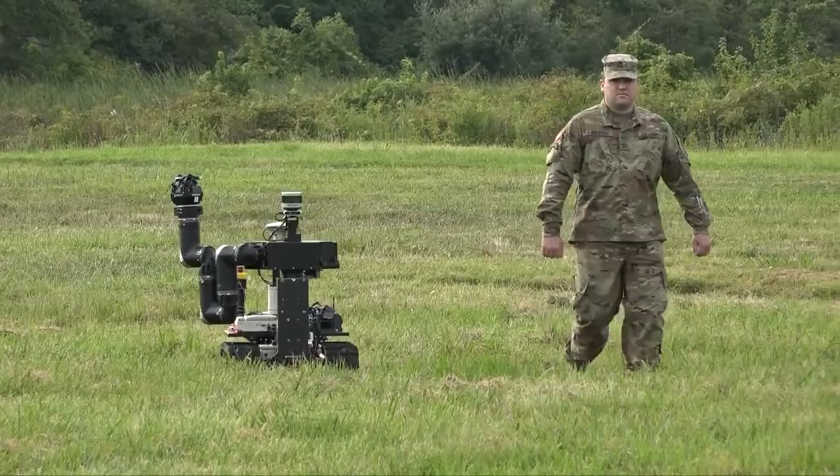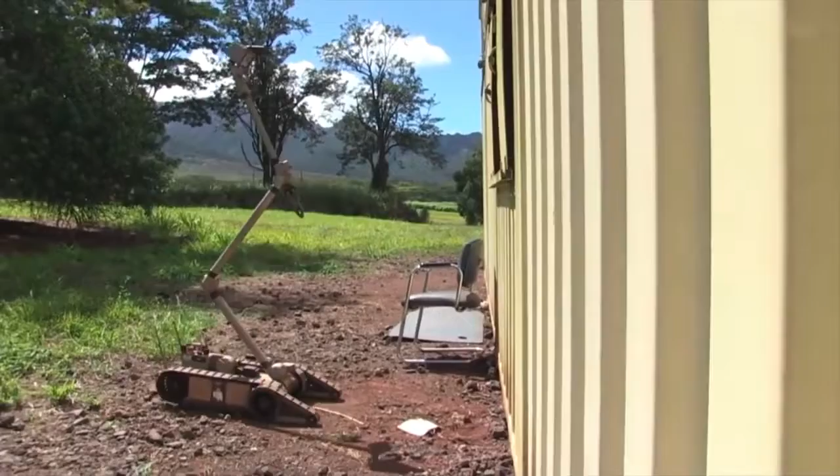The U.S. Army wants robots to operate as soldier teammates without a need to teleoperate robots. To do that, robots must operate autonomously and be able to help a soldier see into places too dangerous to investigate, move into places too risky to navigate, and interact with potentially very hazardous environments.

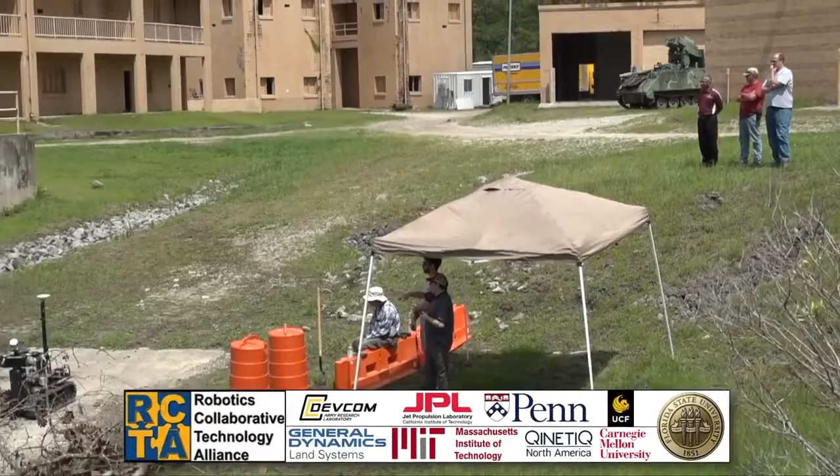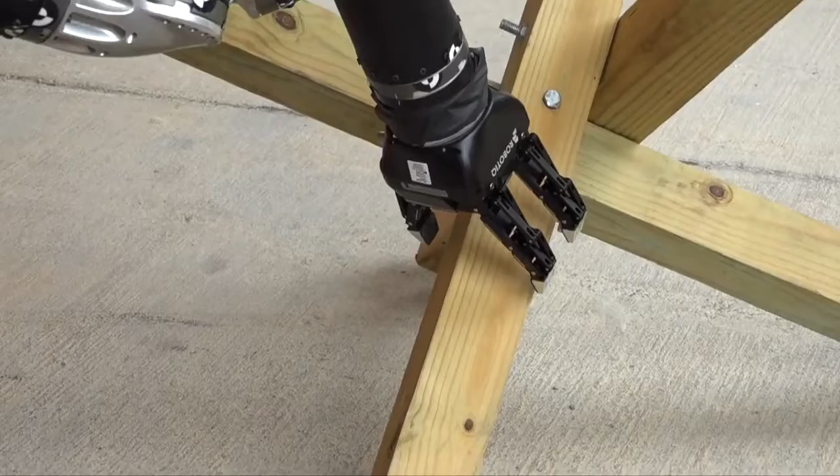At a military training site designed to look like a war-torn city, a team of researchers supporting the Army's Robotics Collaborative Technology Alliance, or RCTA, are testing out years of research aimed at getting robots to perform human-like tasks such as see and understand its environment, zero in on an object of interest, and remove it from its path.

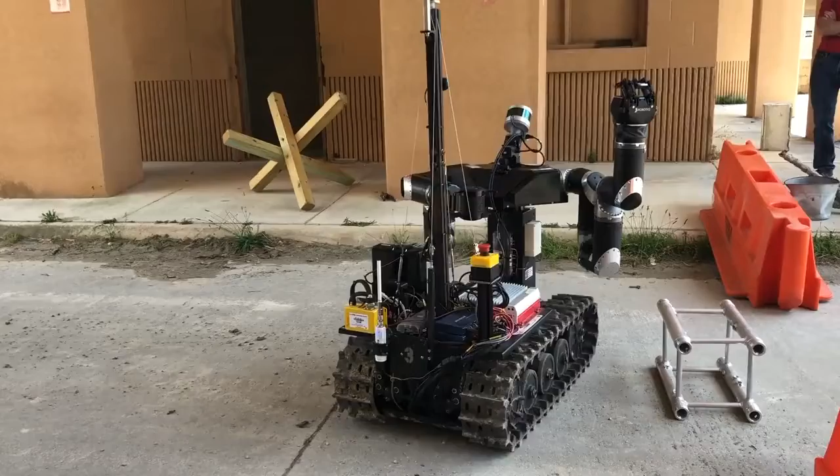In robotics, those capabilities are referred to as perceive the environment, plan intelligent actions, and interact with the environment. These capabilities may seem simple and come rather easy for humans, but are extremely difficult for robots to perform autonomously.

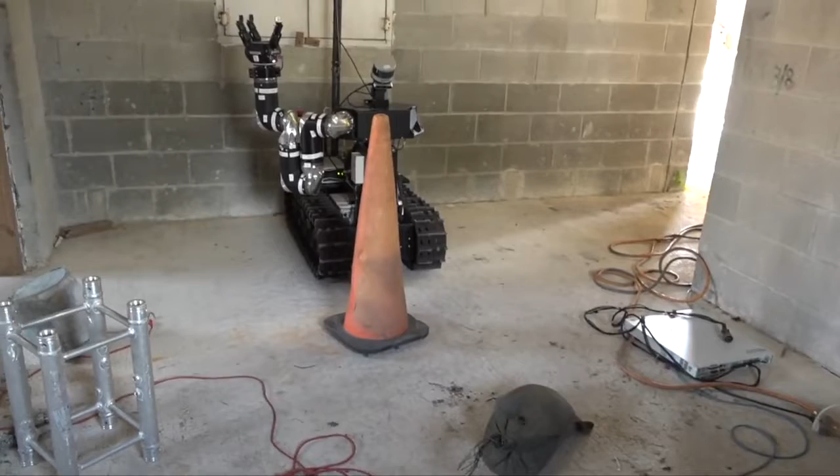It's hard to solve all three of them at the same time because they're interdependent, and so errors in your perception affect how you go about doing the planning. And errors in your plan are affecting how you go about doing the mechanics. Errors in your mechanics, it's all fed back into one another.

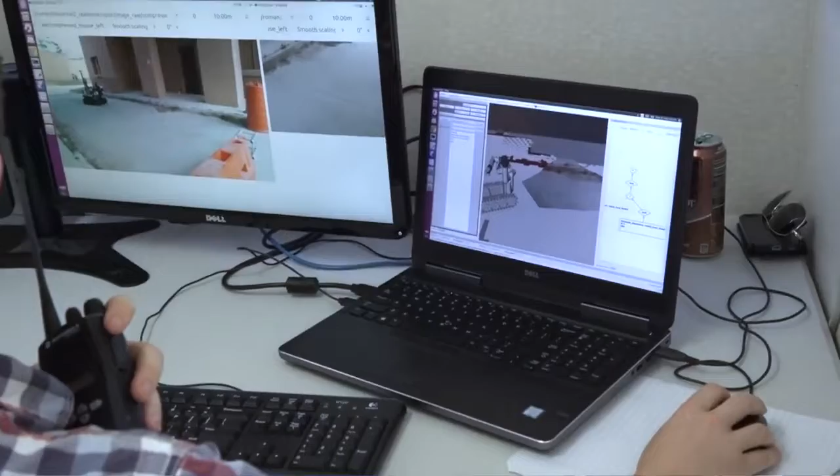And so that interdependent relationship between those different problems is an important factor to consider, so that you're not just solving perception in a stovepipe for the sake of perception, but when you solve that perception problem, you're considering how your solution is going to impact the planning stage and the mechanical execution stage.

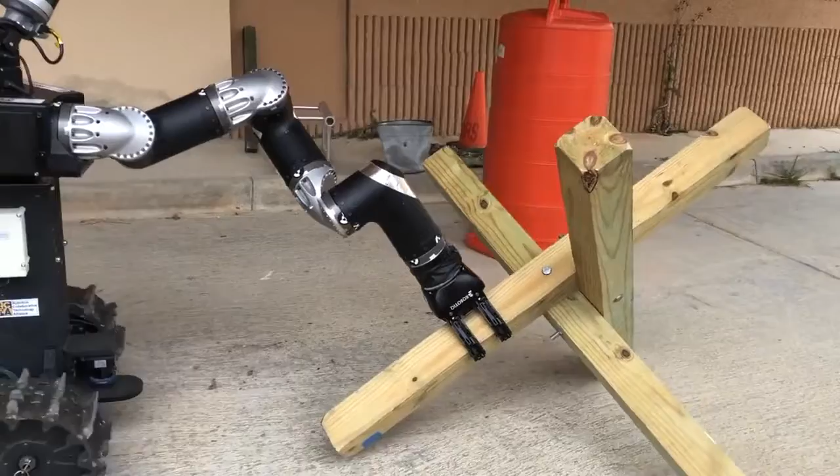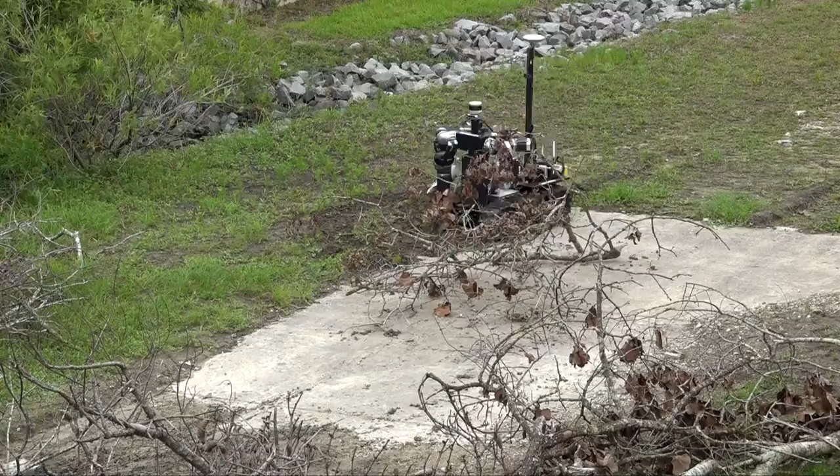I'm very confident that given enough time, given Moore's law and the increase in processing capability, that we're going to overcome those challenges at some point in the future. The question is when. And for the Army, it's really important that we solve those problems first, right? If we have solutions to those issues before anyone else, then we have an advantage on the battlefield. That could mean the difference between winning and losing a battle, and ultimately winning and losing a war.

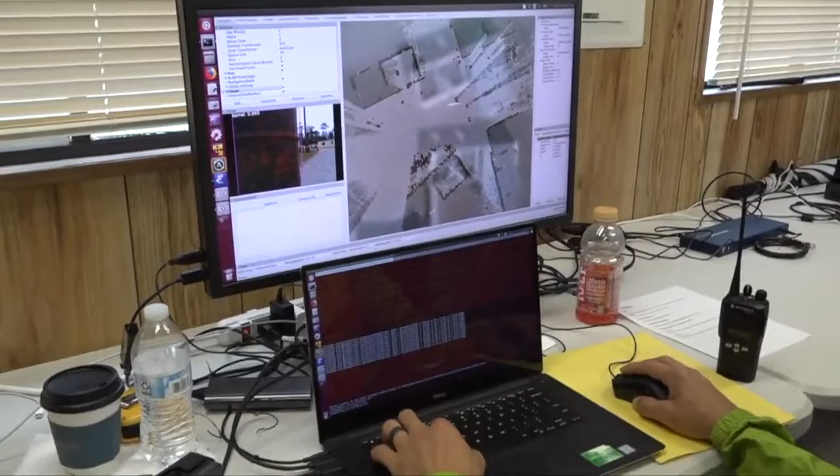The Combat Capabilities Development Command Army Research Laboratory, also known as ARL, is a leader in autonomy research for the Army. Its Robotics Collaborative Technology Alliance has attacked the most difficult research problems in government, academia, and industry around autonomy.

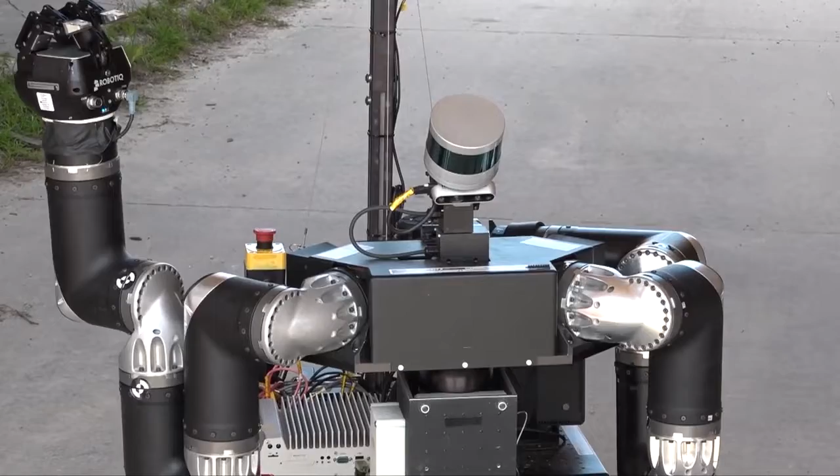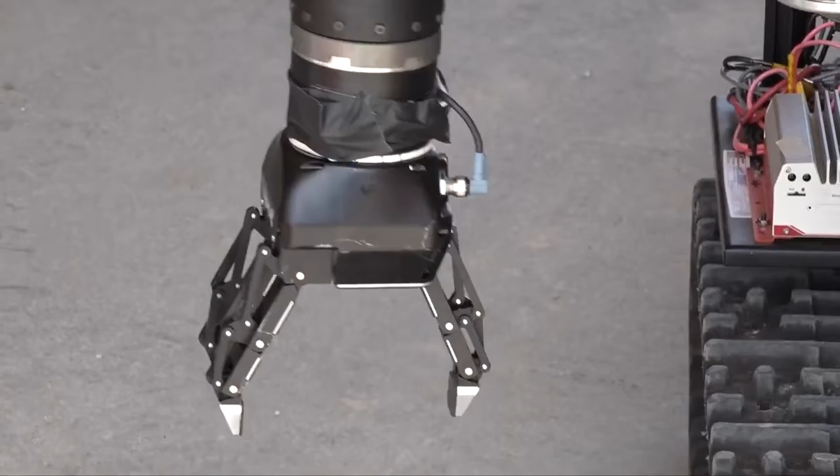In RCTA, we're interested in the problem of deconstructing or clearing a pile of debris autonomously with a robot. And JPL is contributing one piece of the puzzle, which relates to allowing the robot to plan how to move its hand in order to grasp the pieces of debris that make the pile.

The work that we're doing here is in addressing multiple problems at once. So the team is working with the robot and observing the robot behave and trying to understand what the robot is doing, and through that understanding, communicating, giving the robot more knowledge about the way to solve its task. So the team is observing the successes and failures that the robot is encountering and using that information to program the robot to be better at its task.

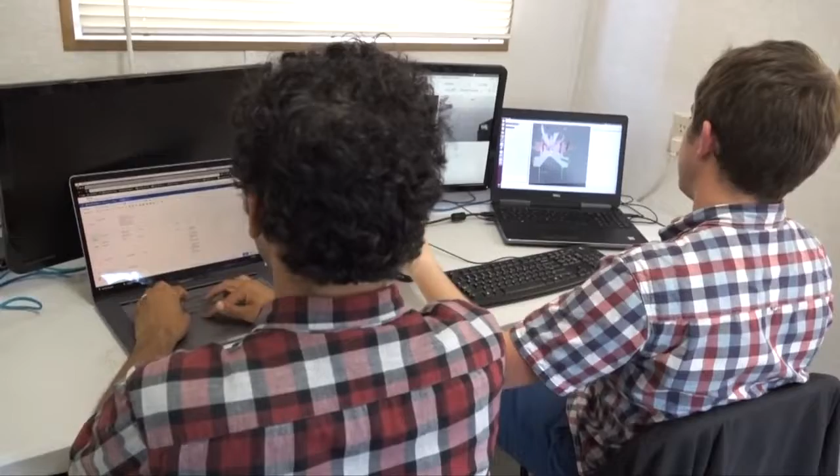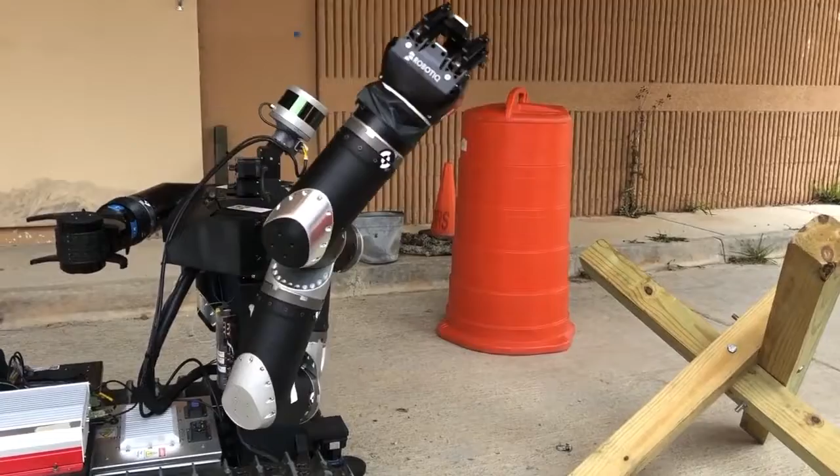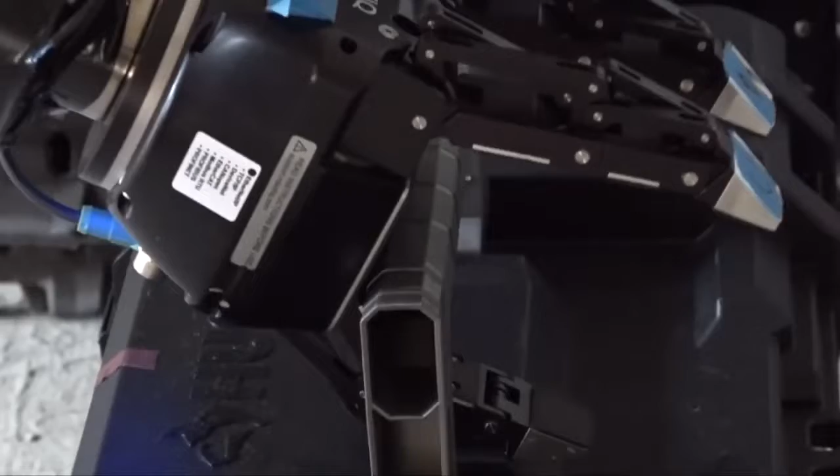Grasping things is super intuitive for humans. We're training to do that our whole life, and we have years of experience using our hands, but also interacting with objects that become familiar with time. And robots don't have that luxury. A robot gets a few hours, a few days of training, and it doesn't have all the prior knowledge, all the familiarity that a human has. The problem that we're trying to solve is to develop algorithms that allow robots to grasp objects that they have never seen before, despite all of those difficulties.

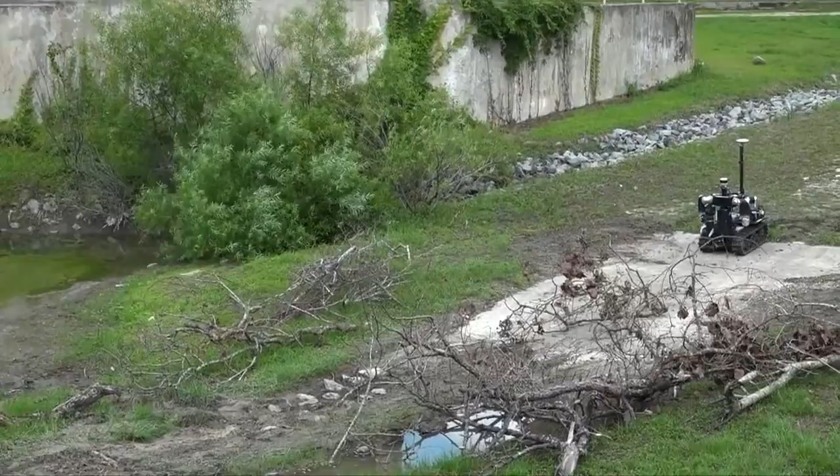To better understand the scientific challenge, let's first understand the experiment in a military context. This task aims to reduce soldier exposure to battlefield hazards by autonomously performing a complex sequence of human-like tasks at op tempo. Here, Roman is deployed to clear a path.

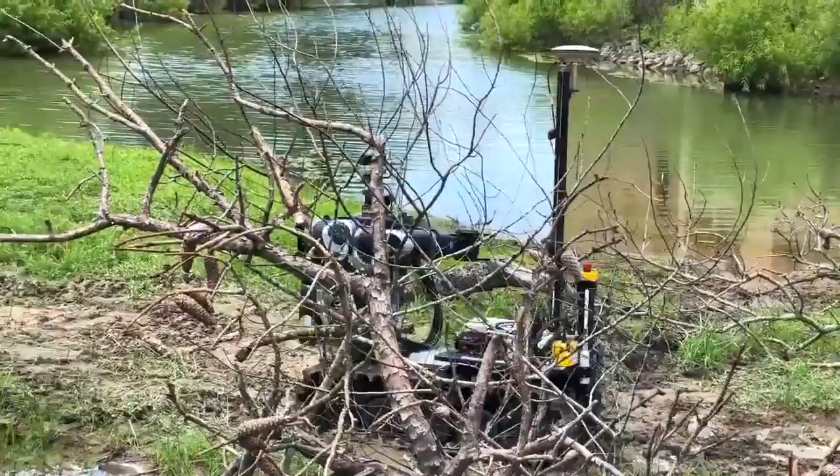Roman drives up to a pile of obstacles, determines how to grasp and manipulate an object in the pile, lifting if it is light, dragging if it is heavy, moves it out of the way, iterates through all of the objects in the obstruction, and finally proceeds along the cleared path to check for additional hazards. Such autonomous robotic capabilities will decrease soldier risks in areas under fire if chem, bio, radiological, or explosive hazards are present, or in a breach scenario.

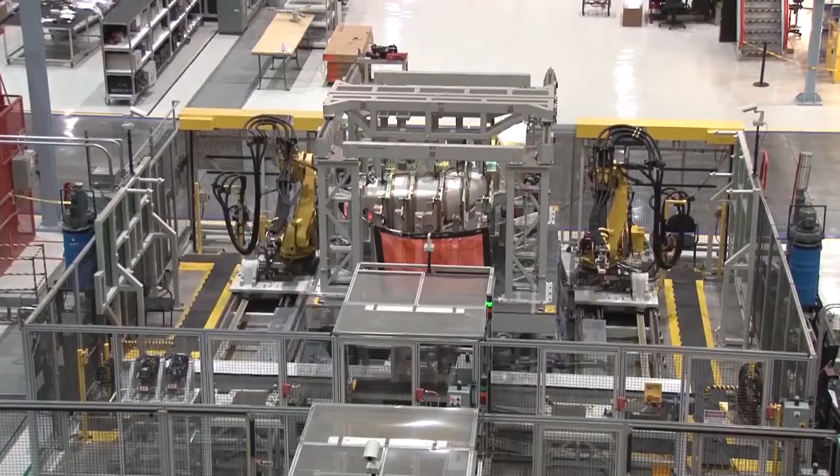This is really the science of perception for action. The main challenge is that we deal with unstructured environments with a lot of uncertainty and with very few data available, as opposed to factory environments where everything is structured and both the hardware for the action and the cameras for the perception are very well planned.

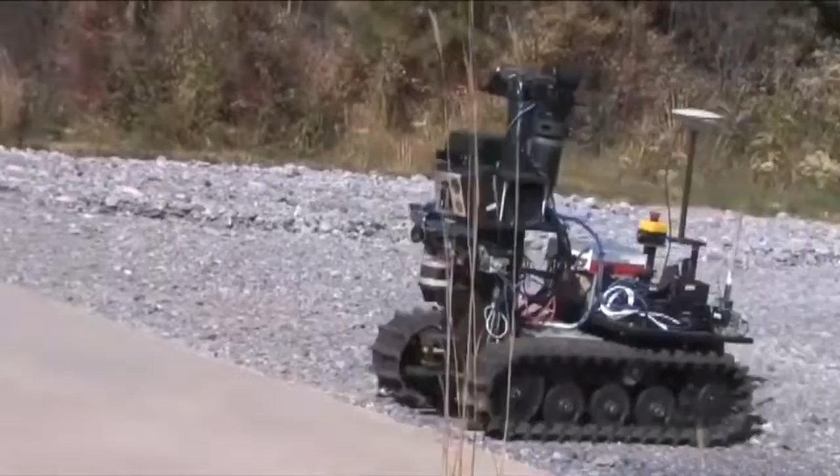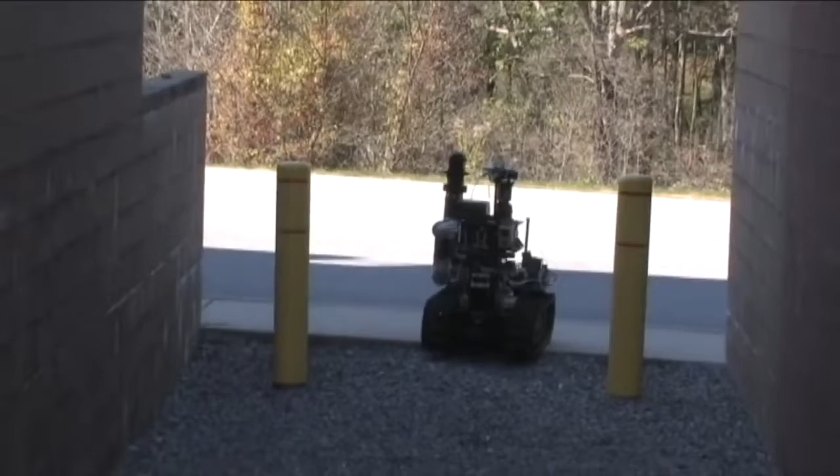In perception for manipulation in this challenging environment, we don't know where the objects are. We don't even know what are the objects. The objects are unknown. Nobody has really provided a database of these objects, so we cannot go ahead and apply any commercial algorithm for that. The problem is still very open.

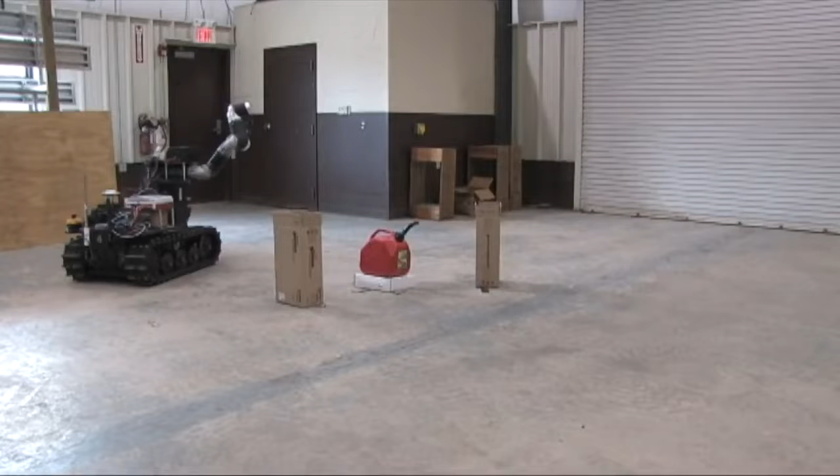It is very open because not only we want to locate these objects, independent of their shape, independent of where they are when they are blocking the road, and then we need somehow to figure out how to grasp them. And when we grasp them and they are heavy, because we're talking about obstacles blocking the way for tanks, for example, then we really have to figure out somehow also their physical properties.

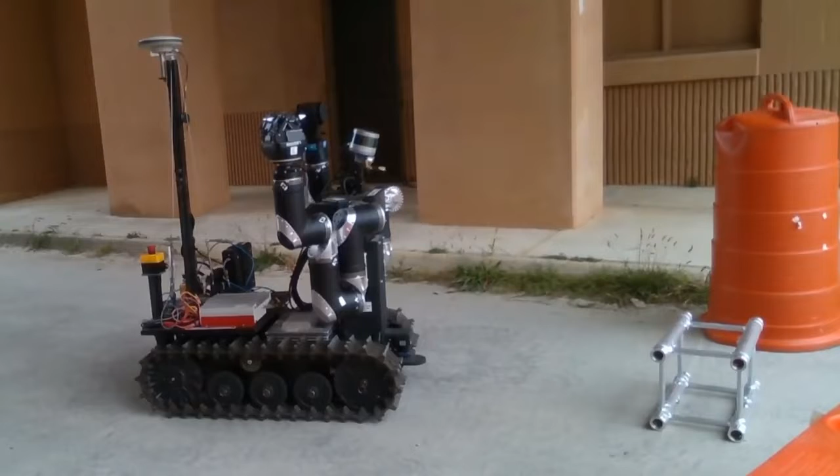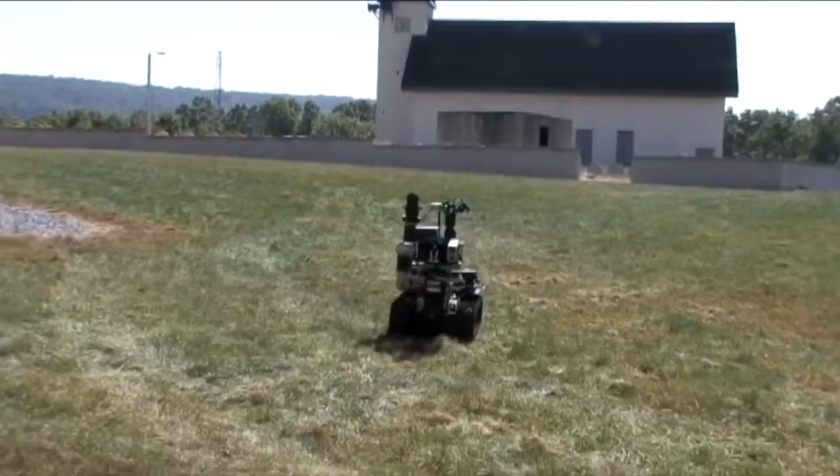We have somehow to have an estimate about how heavy they are so that we plan the right grasping pose based just on what the cameras see and doing it autonomously. There is absolutely no remote control here. Based just on the images, first from far away to detect where are these objects, and just in general obstacles. We don't know whether they are chairs or any other barrier. And then we have to figure out, based on the perception from close, where exactly to grasp them, lift them, and then drag them out of the way.

A short distance away is a group of software engineers who are helping Army robots detect and manipulate unknown objects and navigate unfamiliar environments. The challenge of unstructured environments is by no means just under the military's purview.

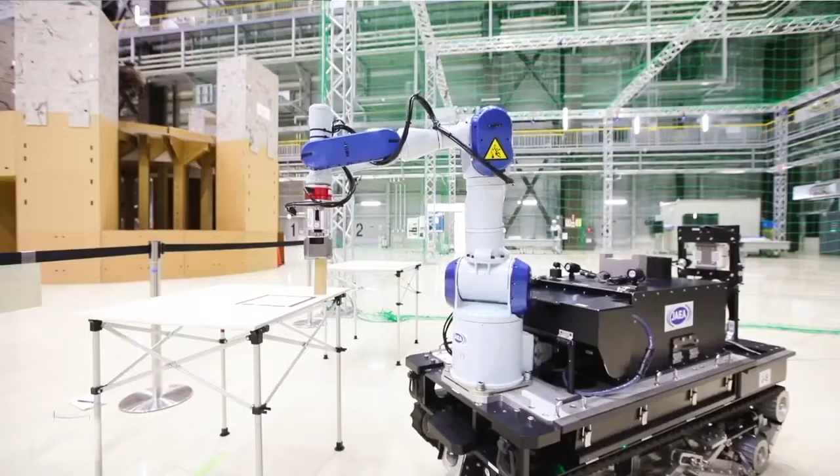There have been other research projects, such as the DARPA Robotics Challenge, where teams were seeking to develop platforms that could go into a radioactive nuclear plant, such as after the Fukushima nuclear disaster, when humans couldn't be sent in because of the massive radiation levels, but there needed to be tasks done, such as sealing up the reactor to keep the city safe. So that DARPA Robotics Challenge developed technologies, some of which led into the technology of the RCTA and motivated the need for this operating in unstructured environments, which is not being solved by industry.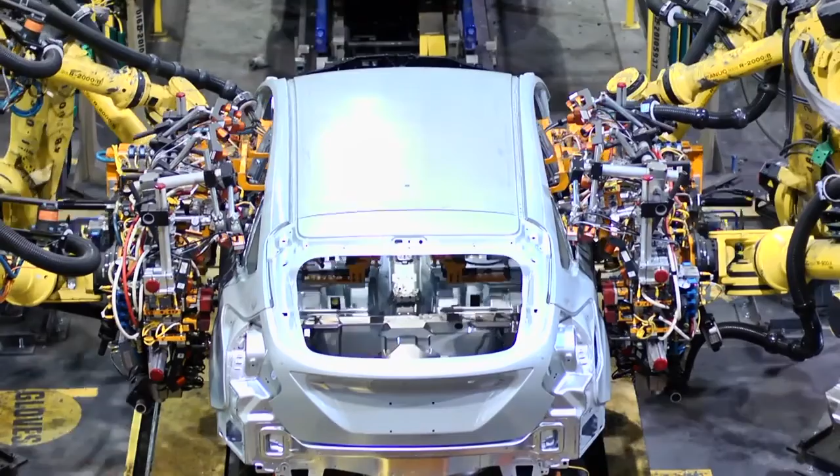For many years, robotics has been very effective operating in environments like industrial automation, for instance, like in car manufacturing, when you have a vehicle production line and giant robotic arms that have to move to a very precise location, spot weld something, go somewhere else. The environment they operate in is very structured, and we can know exactly what they have to do and when. By contrast, we are operating robots in a very unstructured environment.

The idea being that, say, were the military to deploy something like the RoMan to a battlefield, they would send it in ahead and give it some level of instruction like, let's pick up this debris object. And it has to perceive that debris, figure out how to interact with it, lift it up, transport it around with no prior knowledge of the area that it's going to be working in. So it's that unstructured environment that adds the large challenge to what we're doing in comparison to traditional robotics.

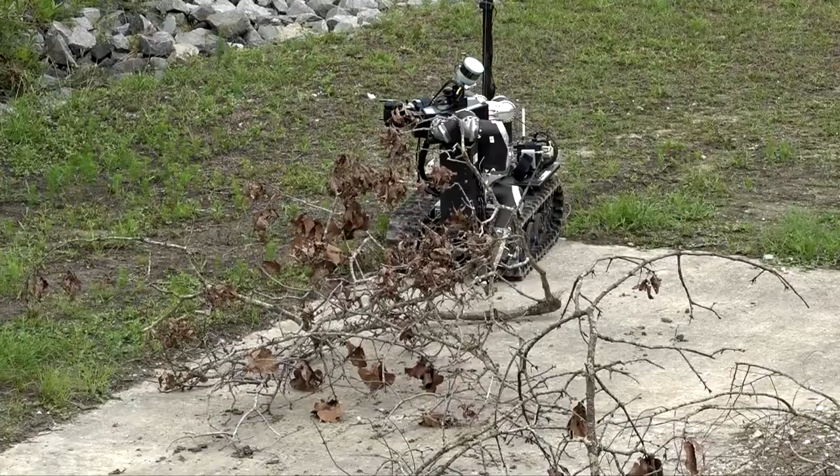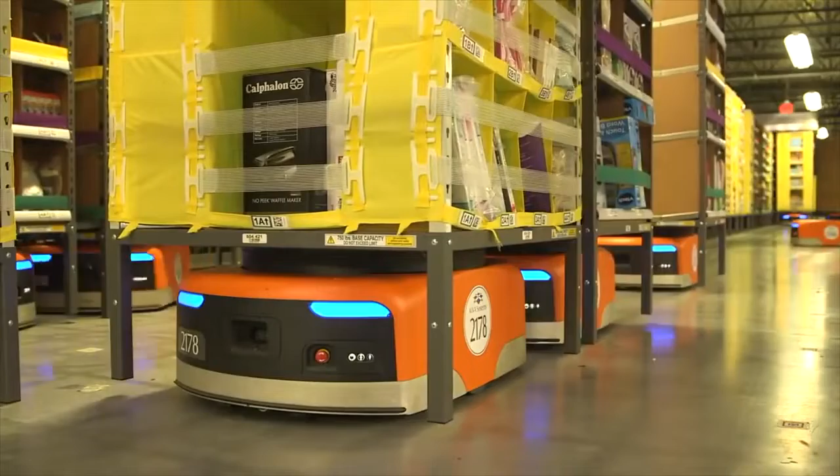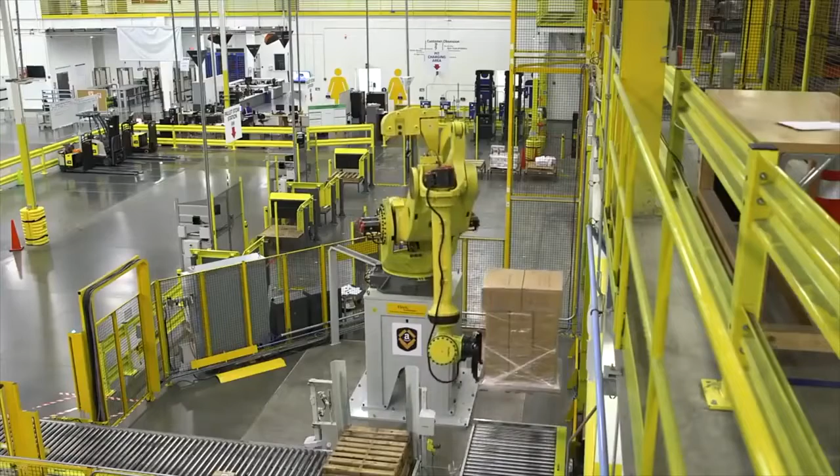The problem with the algorithms available in industry is that they are almost non-existent for this unstructured problem that we're facing. Companies like Amazon, for instance, use an extensive amount of robotics in their logistics and warehouses and such, where you have an extremely ordered environment. You know where the shelves are, you know where all of the different visual features of your warehouse are. You can send the robot from point A to point B quite easily and say, lift up to this height, grab box A from shelf C, as opposed to this, where we have no concept of what environment we send this robot into.

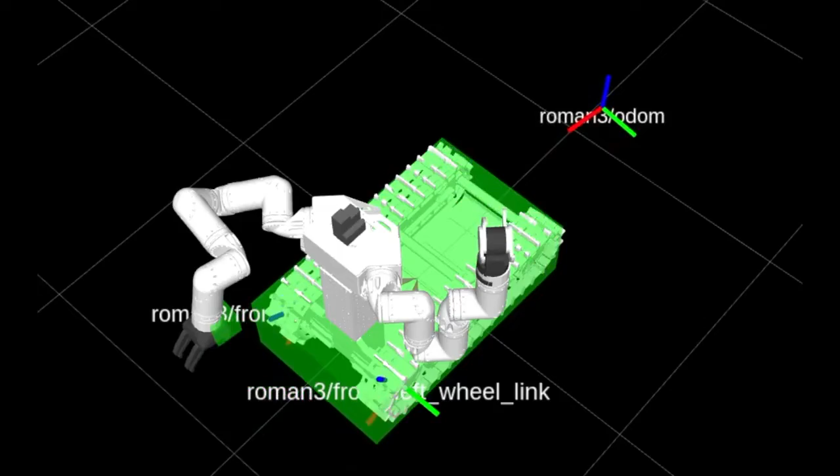So that is where the novelty of this research comes in, in that we are developing new algorithms that allow us to interact with these unforeseen objects and things that the robot hasn't been explicitly taught to work with.

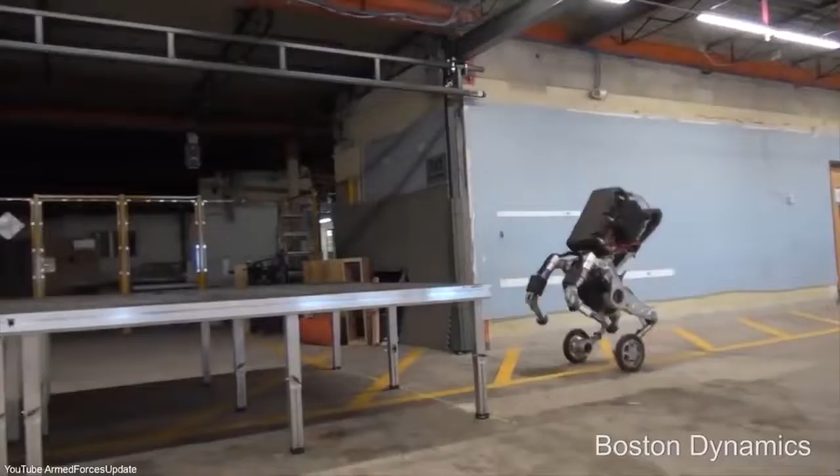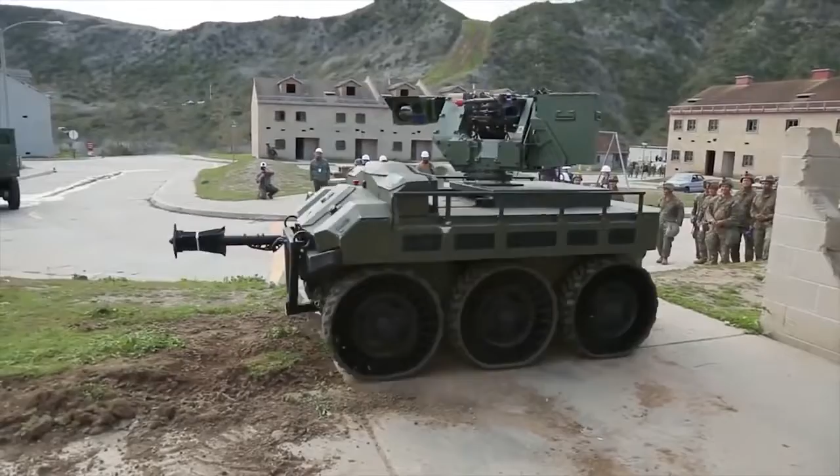Industry has a lot of advantages over what the military has to do, because in industry, you can design your environment to help make the problem easier, right? You can kind of meet your robotic solution halfway by changing the environment and structuring the rules within that environment to make these problems easier. The Army doesn't have that luxury. We have to go into completely unstructured environments, unknown, haven't seen them before, and deal with whatever we find. So we need really robust solutions, and we don't have the luxury of simplifying that problem down.

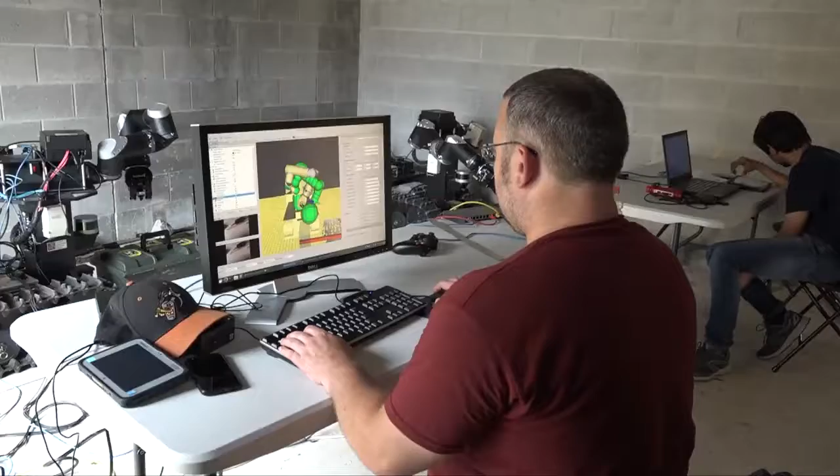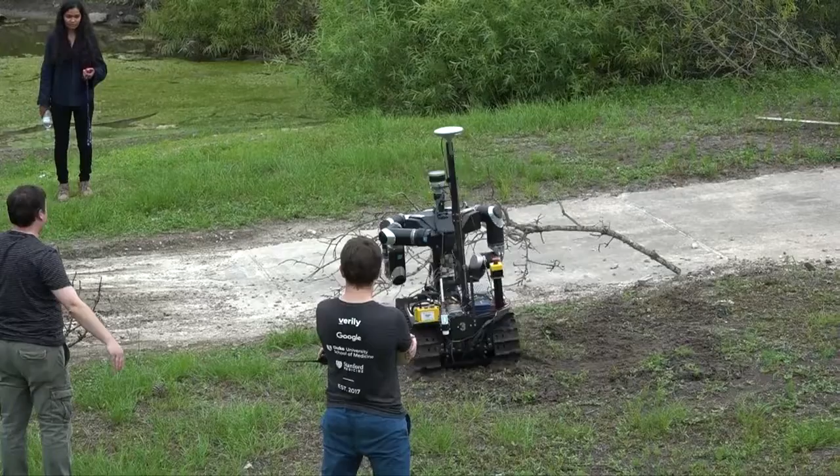So what we're trying to do here is develop algorithms and solutions for an extraordinarily broad set, a broad class of objects that when we send the robots out into the field, they can then deal with new things that they haven't seen before. And that's really our goal.